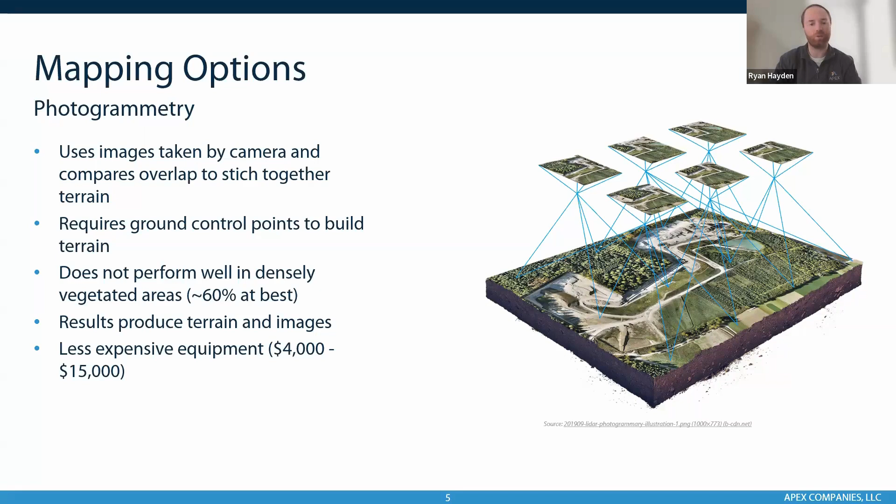The results produce terrain and images, which can then be used in CAD or other processing software to build the surface and from that point build the base plan. For this option, the drones on the market today vary pretty widely, but the industry standard, generally speaking, is about a $4,000 drone at the minimum, up to about $15,000 for some of the nicer options.

One very famous example of when photogrammetry was used was for the reconstruction of the Notre Dame Cathedral in Paris. In 2010, this was flown for aerial photography and photogrammetry to help build and progress the photogrammetry community. And when it burned in 2019, the images that were taken in 2010 were used directly to help reconstruct it to its historical look.

The second mapping option that I'll discuss is LiDAR. So this is light detection and ranging. It's similar to sonar underneath the water. It shoots a large amount of lasers from whatever angle you're pointing it at, and it basically develops a surface based on how long the pulses take to come back.

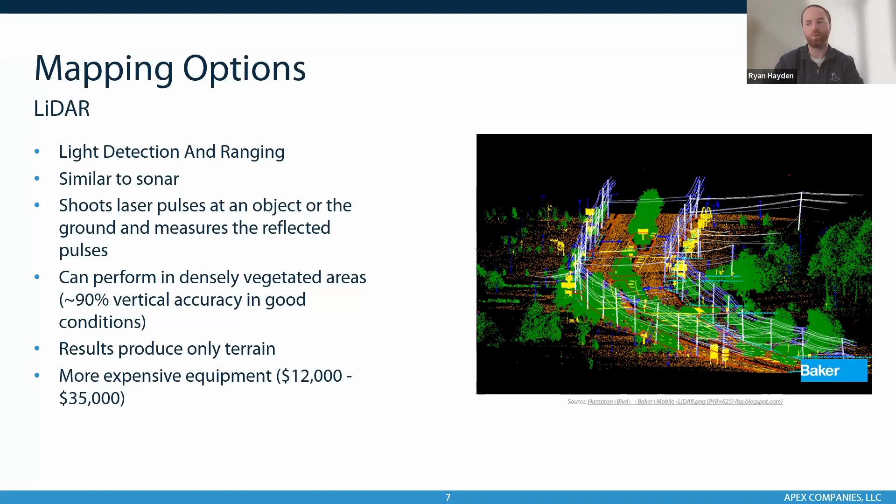This can perform very well in vegetated areas due to the fact that it's shooting a laser instead of taking a picture. And the results produce only a terrain, so you get no aerial photography, but the terrain must be used in the same way as photogrammetry with ground control points. This option is much more expensive, relatively speaking, with the nicest equipment ranging up to $35,000. But a lot of the drones have what's called a payload, which can be interchangeable. So oftentimes you can get one piece of equipment and have multiple payloads that offer the ability to switch between them.

A famous example of LiDAR is the ancient Mayan ruins in Guatemala, similar to finding ancient cities in the Amazon as well. A group of research students in 2024 were scanning a LiDAR survey that was taken in 2023, which uncovered an ancient city that had been lost to time and overgrowth of the forest.

I don't know if there's any questions up to this point. I can jump right into data accuracy if not. Nothing yet. Keep going, Ryan.

Great. So there are types of data that are used within civil engineering that we're all familiar with. Total station survey and GIS are probably the most common. Total station survey being on-the-ground survey using field equipment, tripod legs, and it's the most commonly used type of survey. MassGIS offers aerial imagery that has created 1-foot or 3-foot contours. And photogrammetry and LiDAR are the two that were just discussed.

So I'll give you a second to look at the comparisons between them and talk left to right on the screen. So with photogrammetry in open areas, areas where we would generally consider it to be a good option to use, you can expect accuracy up to 1 centimeter horizontally, and vertically between 2 and 3 centimeters is an average expectation. You obviously need ground control points, as discussed before, and it produces a very high quality image. Oftentimes it's 2.74 meters per pixel, and it can be used for engineering design. Generally speaking, for a large intersection, as an example, you can expect in the millions for number of points that photogrammetry produces.

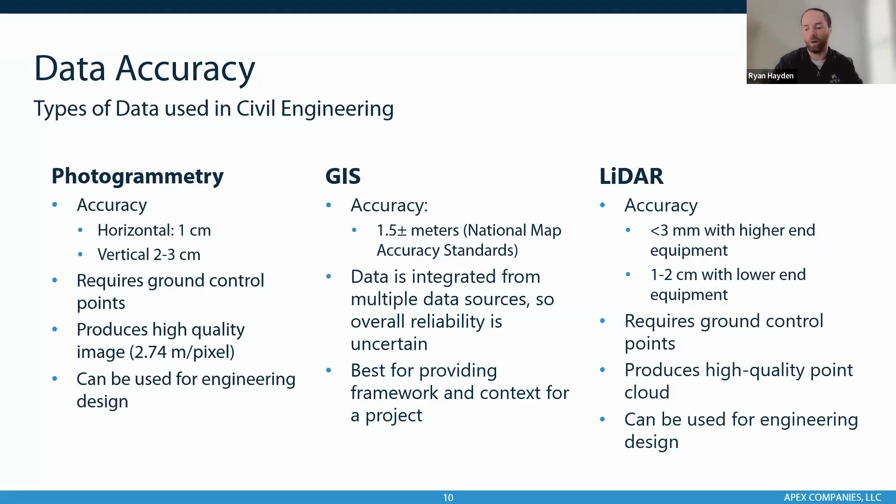Again, if there's any questions, we can pause. We're good. Cool.

So uses within our industry, I'm going to go through a handful of points here. The first of which is transportation use. This is generally not traffic. It's just ground control or ground transportation purposes. So what we can create from using drone data is surfaces that can help us to delineate water paths, I should say, runoff. We can create contour and elevation maps, point cloud and aerial photography, and base plan preparation for use as an in-place survey, if you will.

It is worth noting that unless you have a PLS that can stamp a survey, this is a substitute that can't replicate it exactly. However, if you have a PLS that can stamp a survey, we have been receiving surveys as of late where surveyors are using drone photography and drone photogrammetry in their processes. So by using drones, you are using what the industry is moving towards anyway. We're generally moving away from total station survey unless it's absolutely necessary.

Traffic analysis is the next one that I'll discuss. So one of the latest pieces of using drones in the industry that is really cool is that you can do live video feed to a YouTube channel or a website. So this could be used, say, for a news station, or you can use it for presenting. You can see what live traffic looks like at rush hour. You can also partner with video analysis software for traffic counting. There are many out there that we have partnered with already and that are willing to take on the task. So that's a very cool part of where traffic analysis is heading.

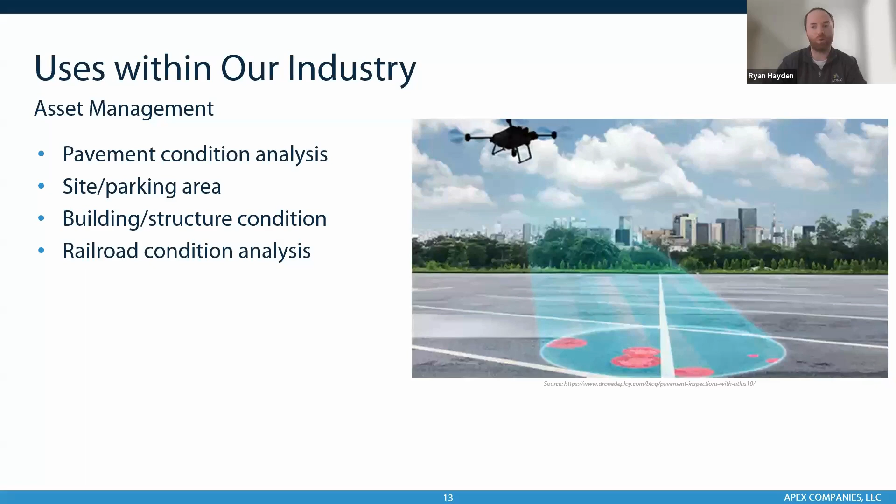Asset management is a big part of using drones, mostly because you can pull really quick data. You can have pavement condition analysis from a pre-construction to a post-construction condition. Parking areas are a great one. Building and structure conditions, so looking at bridges, water towers, smokestacks, anything that you can find within the public space. And railroad condition analysis is a really cool one that MassDOT is partnering to advance. They're using drones to help identify places where repairs are needed along the railroad tracks, considering that a lot of the railroad tracks are inaccessible by car.

Water and wastewater is a fantastic space for the use of drones. Water tower inspections, along with other structures, wastewater treatment plant inspections and monitoring, and base plan preparations as previously discussed.

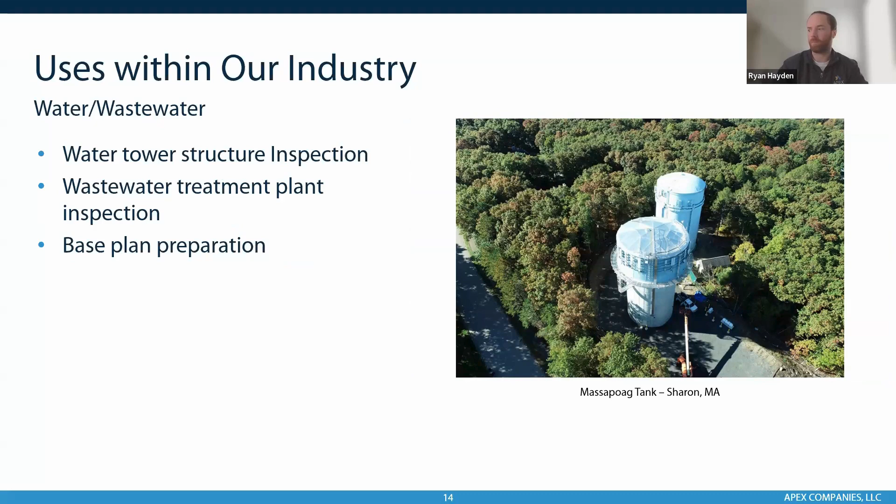And then after disasters as well. I don't know how many of you might remember from 2 years ago when there was some flooding down in the Attleboro area of Massachusetts. A bunch of firms were able to get their drones up in the air to highlight where and how much the failures were occurring within the stormwater system.

Construction usage is a great opportunity for using drones. Quick analysis for fresh pavement to look at grades is an awesome use for it because you can get a quick surface from it, and then it can show you contour maps within certain programs that you can plug the data into. Active construction progress photos and videos are a really cool way to use it. As seen in the picture off to the right, we were actively tracking what the smoke levels were around a hot in place recycling project in Newton, Mass back in 2023.

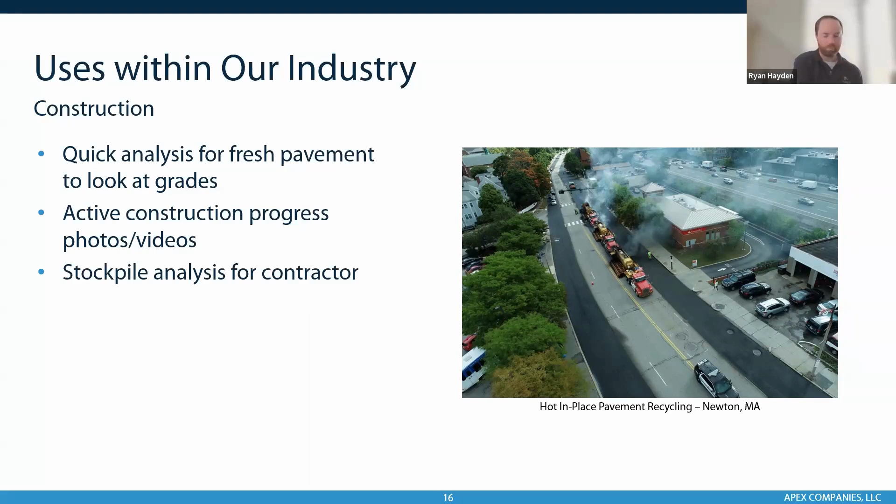And then finally, marketing. So obviously with marketing, there's a lot of uses. You can post things on social media, post things on your town or city's website, presentations to the public. As I mentioned before, live feed video for either poor functioning existing infrastructure or recent improvements. And then before and after pictures are a really good way to help the public understand what it is that we're doing with the tax dollars that they're contributing to the community.

Non-uses for drones start with tunnel interior inspections. Drones need aerial space to fly. So again, there are drones that are coming out now where the camera is on top of the drone. So this may be something that advances within the next few years. But as of right now, all drones have a payload that's underneath the wings themselves, and it can't look up through the wings. So tunnel interior inspection is something that still has to be done on the ground.

Urban project analysis. So as mentioned before, if you have to fly over people, you must obtain a waiver through the FAA. This is for safety. The FAA has identified that if a drone were to crash over an urban area, it could, in all likelihood, hurt somebody. Which is the next point, the nighttime work. That's the same reason. If it were to crash, you'd be putting people at risk. Also at nighttime, a special camera is needed, but that isn't necessarily a limiting factor. It's more about the safety aspect.

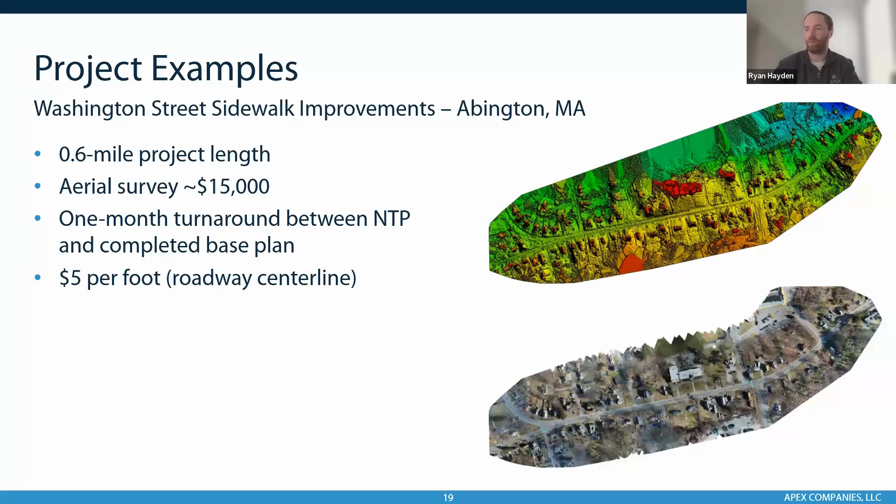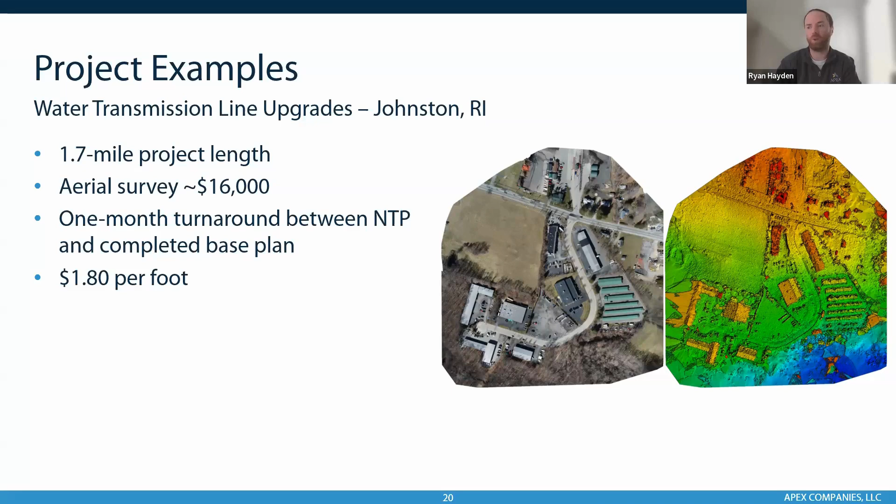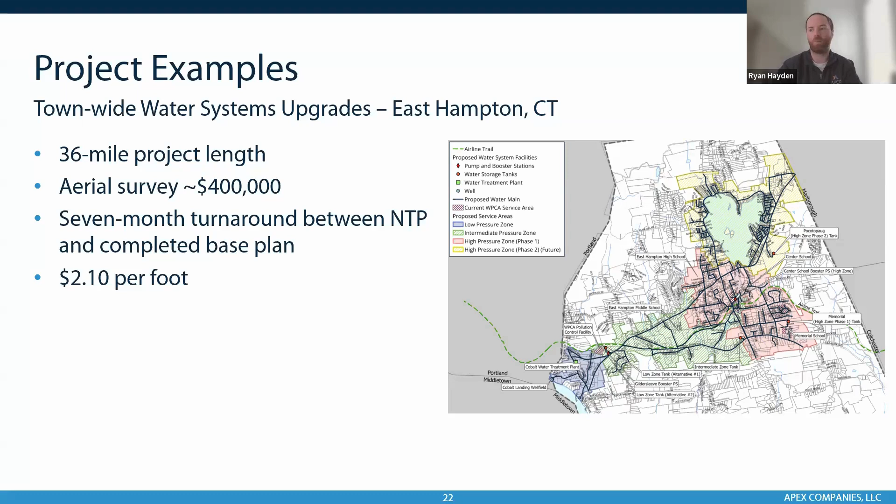And again, due to the large size of this and the amount of time it was going to take to process, this cost a little bit more, about $2.10 per linear foot. But generally speaking, it's still within that same ballpark. We usually shoot for $1.80 to $2.20 per foot. That seems to be the area of comfort, I guess, where we can get all the data that we want and not provide the clients with too high of a quote.